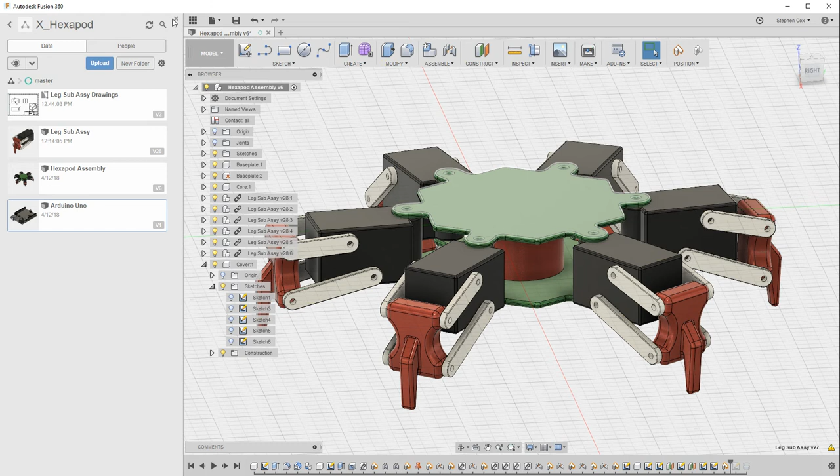So what I want to do now is introduce an electronic control board to be able to control this hexapod, and in the data panel I've found an Arduino board from an external source and I've uploaded that into the data panel, and I can now just drag and drop into the workspace in exactly the same way that we've done before. I'm just going to lift that up out the way.

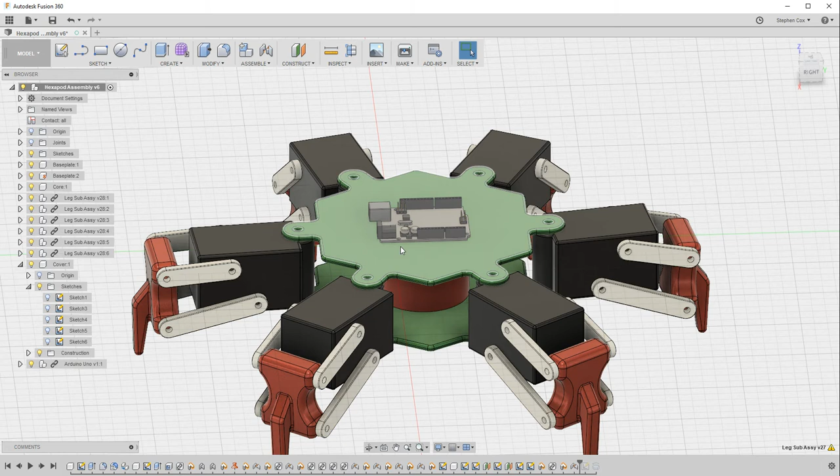Because what I'm going to do now is create a joint. I'm going to create the joint between the center of that top plate and the center of the underside of the Arduino board, and it's going to be a rigid joint because the two are going to be screwed together. So that gives me the Arduino board now in this assembly, and it gives me some reference to be able to work to make sure the cover that I put on over the top of this will actually fit and not interfere with the Arduino board.

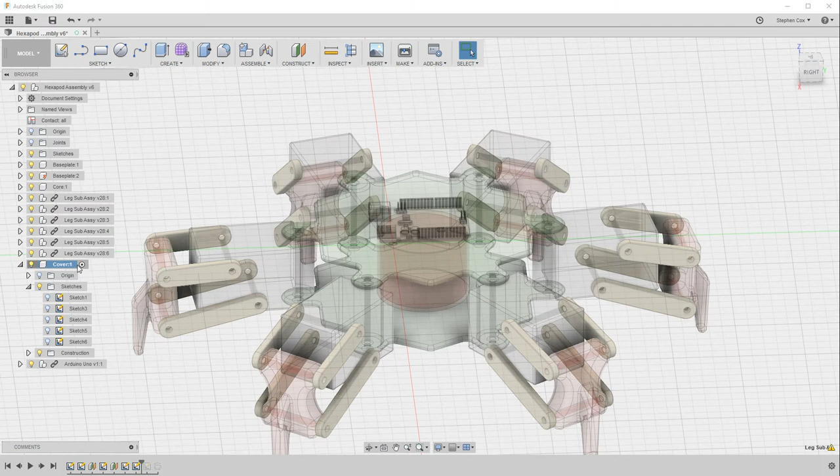So we're now going to create the cover. I've already created a component in the browser, so I've done create new component and created a cover, so I'm going to activate that. What we're going to do to create that cover is look at a number of different ways that we can create a cover, using some tools in the create menu that we've not yet used. We've used extrude a lot, but we've not yet used revolve, sweep and loft. So we're going to use those 3 tools now to look at some options to create a cover.

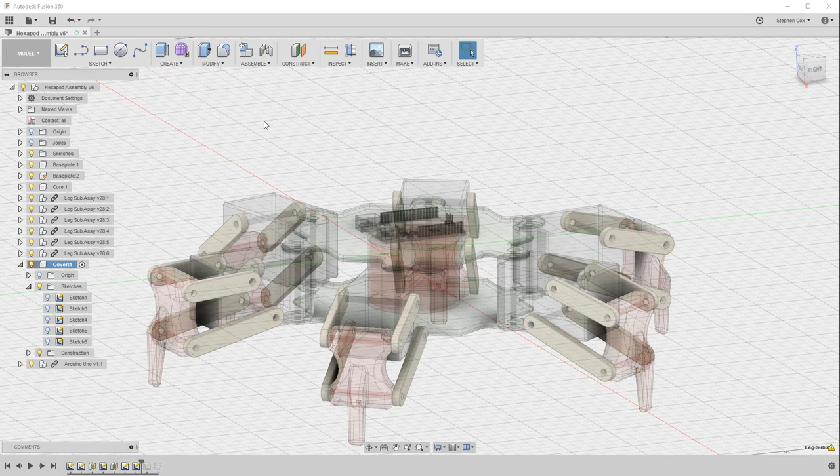So the first one is I've created this sketch profile. This is 2 straight lines, and this curved line connecting them is called a spline, which is underneath the sketch menu. It's a great way of creating really nice curvature lines in your sketches, and that's given me this profile which I'm now going to revolve.

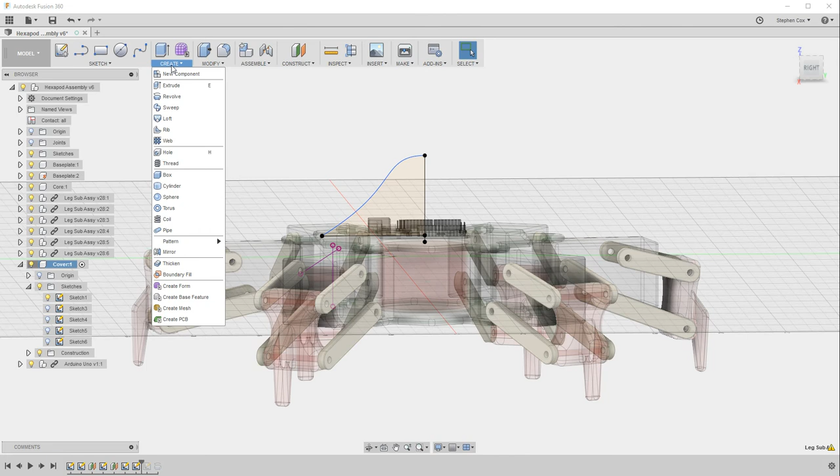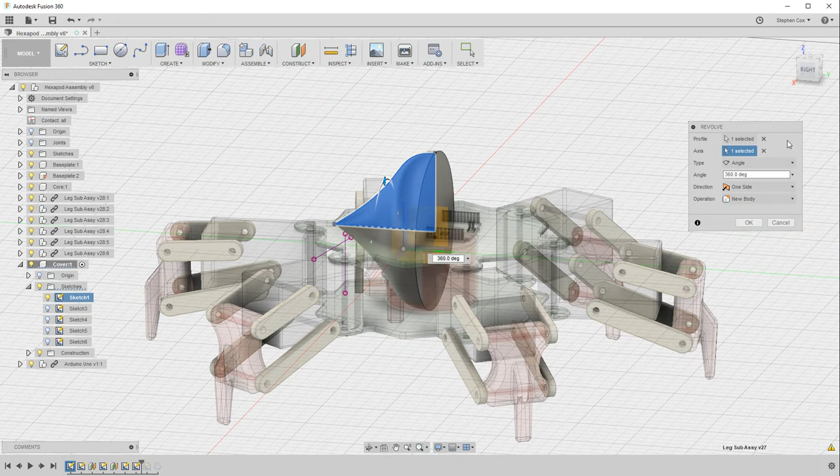So I'm going to create, revolve, pick on that profile, and I've got 2 options now. I need to select an axis to rotate that profile around. Now I could pick that particular axis, which will give me one particular way of revolving that profile, but it's not the one we actually want. You can see I've got a second axis in this sketch I could rotate it around. It's actually the vertical axis that we want, and when I click on that you should see that we've got this really nice shape, taken and revolved a full 360 degrees, and that's the shape we end up with.

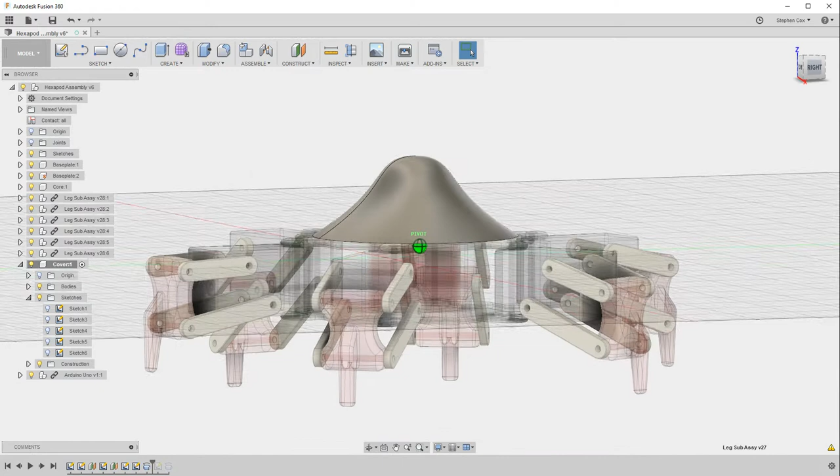So that maybe is quite an elegant sort of shape to use, but maybe not the one that we want to use. So we've got another option.

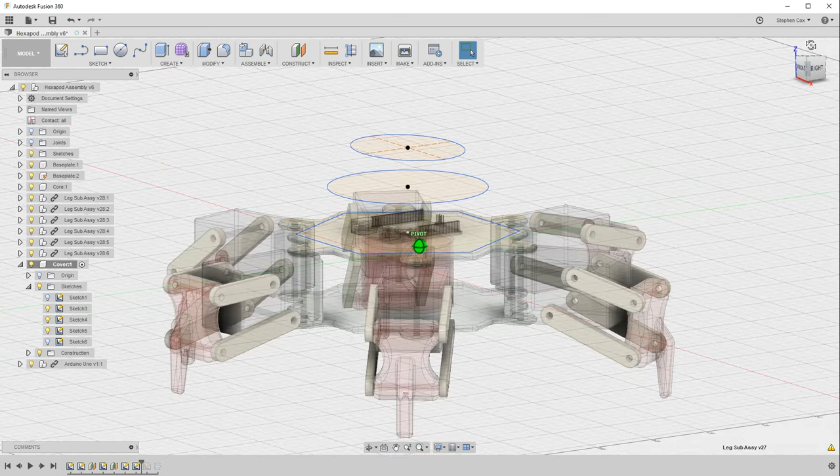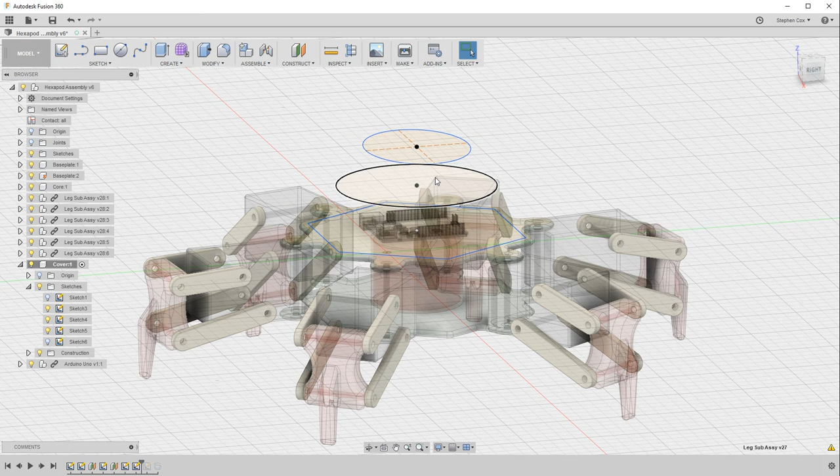Now if you need to create a plane in mid-air like I've had to do here to create these sketches, under the construct menu you can create this thing called offset plane. If I click on that plane there, I can now lift a plane above that by 60 millimeters. So that's how you create an offset plane. I've done that a couple of times to create these 2 planes, and then sketches on those planes are actually hovering over the base plate.

So I can now use the Loft tool under create, and I can click on this hexagon and transition that into that circle, and then transition that circle into that ellipse. So that gives me a shape transition between those 3 sketches. So that's what Loft does.

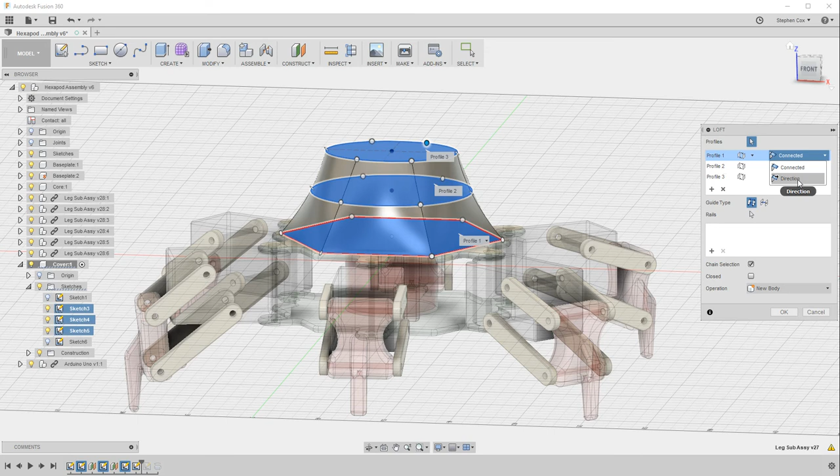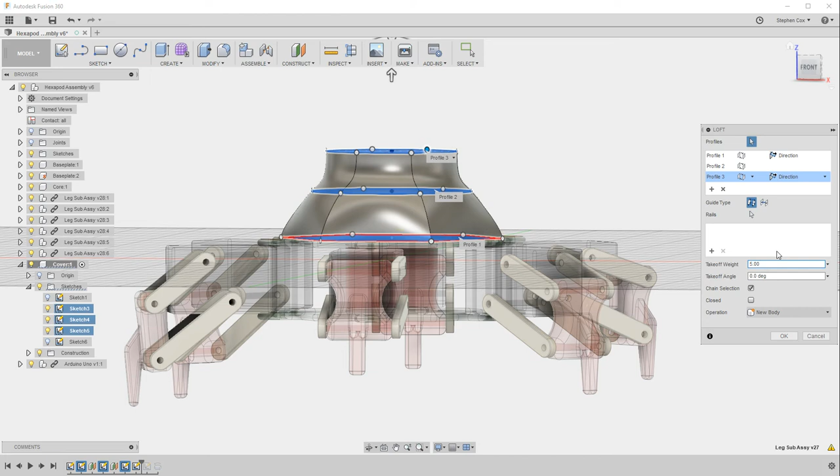Once I've created that, I can play around with some of the options. I can change things like the direction of the loft, and I can add some guide rails to help drive it in a certain direction. This takeoff weight, if I change that to 3, you can see that changes the shape. If I change it to 5, you'll see it change the shape again. So there's lots of options under Loft to adjust the way the parts actually transition.

But if I'm happy with that I can accept that, and that's given me a cover design now for my hexapod.

I'm now going to use the final tool that we've not yet seen, which is sweep. So I've got a profile here that is actually an ellipse with some chunks taken out of it, and that sketch has been designed in connection to the sketch that I created, the ellipse for this loft.

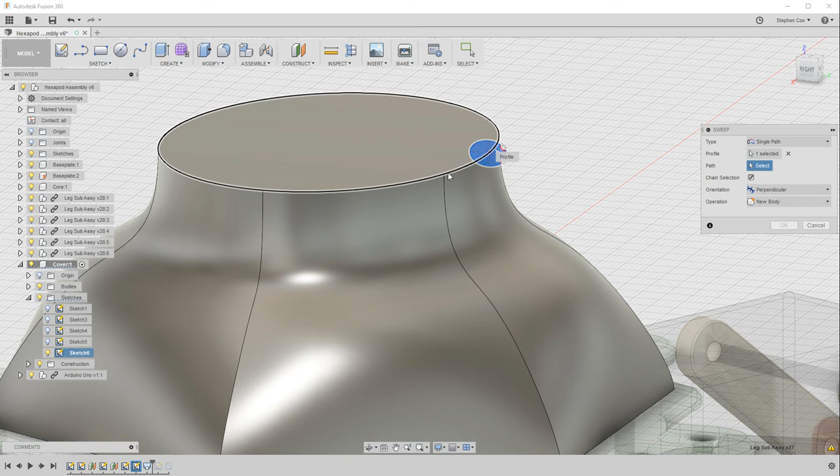Because what sweep allows you to do is, when I click on the sweep tool, it allows me to select that profile and then choose a path to drive it along. In this case it can be an edge or it can be a sketch profile, doesn't really matter, both of them work. And if I click on that path, you'll see it's doing a cut command because it's cutting through that particular shape that's underneath it.

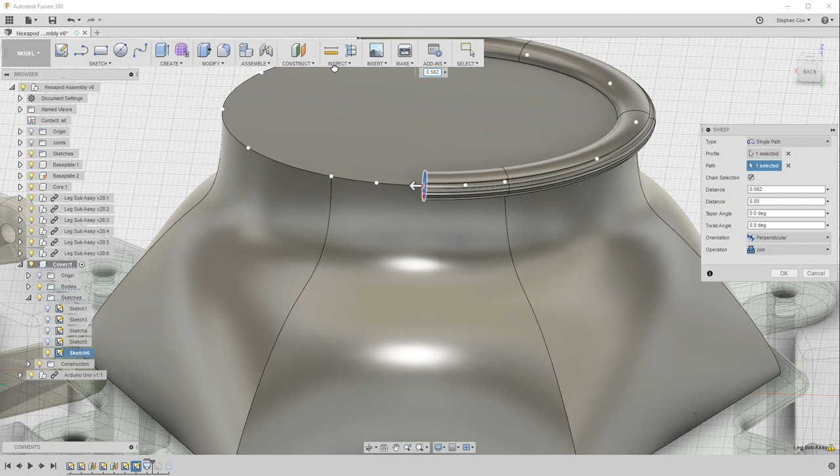Maybe I want that to be a join rather than a cut. So what that's done is now taken that particular profile and driven it around that particular ellipse. So I can grab this arrow and I can show you what it's doing, because basically it's just taking that profile and dragging it in a full 360 degrees around.

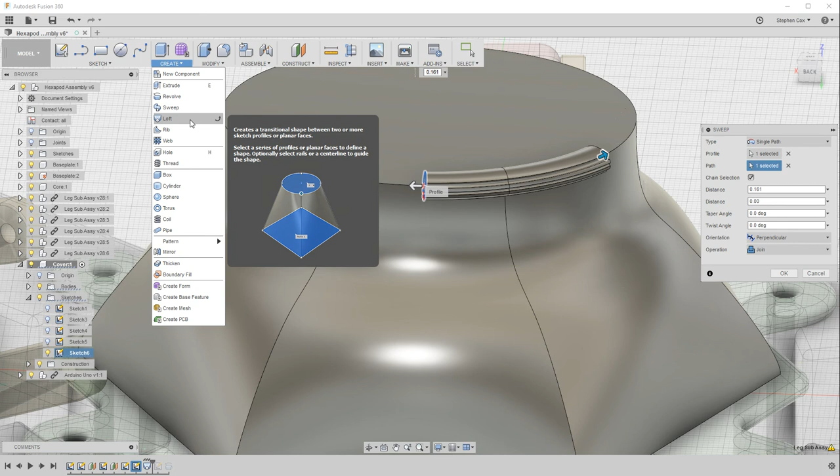You don't have to have it the full 360, you could stop it short if you wanted to, but by default it's going to do the whole path. So that's the sweep command, it takes a profile and sweeps it along a path. So those are tools under the create menu that we've not seen before, but you've now seen extrude, revolve, sweep and loft, which are the 4 primary ways of actually making 3D geometry.